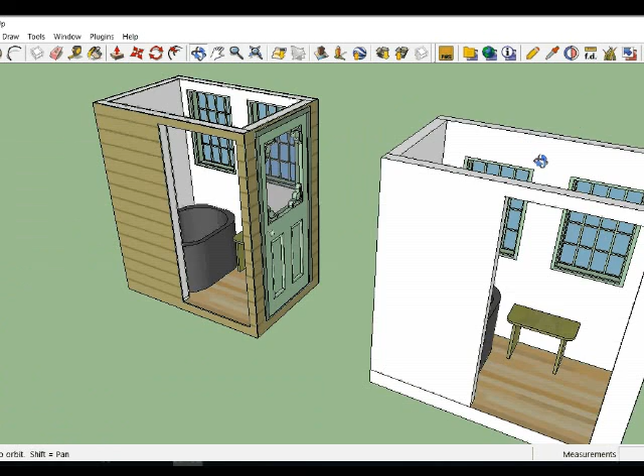So here's the supplies and materials that I've got so far. Okay folks, this is what I am planning on building off of the back of my cabin, which is the north side. I already have an existing door that is 3 feet wide, so this opening here is going to fit over that 3-foot door.

Now I show this as a 6x4, but I've actually decided to go 8x4. It will be longer because I need a little more room to open the door up, and it will also allow me to use my existing 3x3 windows.

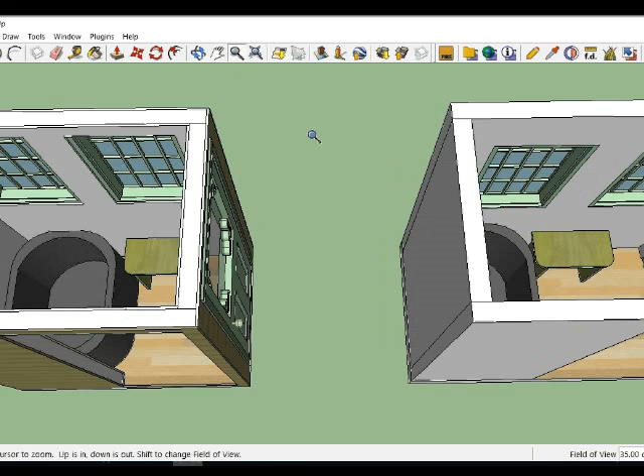So this is going to be a mudroom and a place for my Japanese style hot tub and bathing tub. It will have a door on the outside so I can go in and out, and then my door here on the cabin wall opens out to the exterior. So I'll be able to come in and hang up my winter coat and put my boots away out here when I'm out feeding the stock, and then come back into the cabin.

Because this is on the north side, this door on my cabin tends to be cold and has a bit of a draft. By putting this insulated room over the door, I should add some wind protection to keep the draft down and keep some of the cold out of the cabin. So that's the benefit to the cabin, but it also gives me a place for a tub, because I don't have one in my cabin, only a shower.

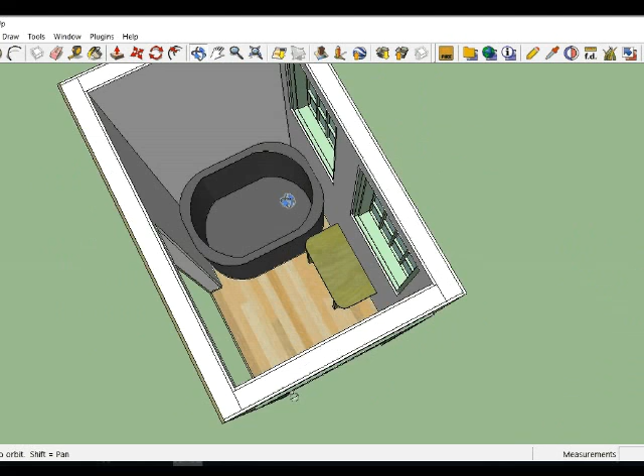So I'm going to put a water trough tub in here that I've already used as a hot tub, and I'm going to plumb that separately from the house. It has enough room to be used either as a hot tub or as a regular bathing tub.

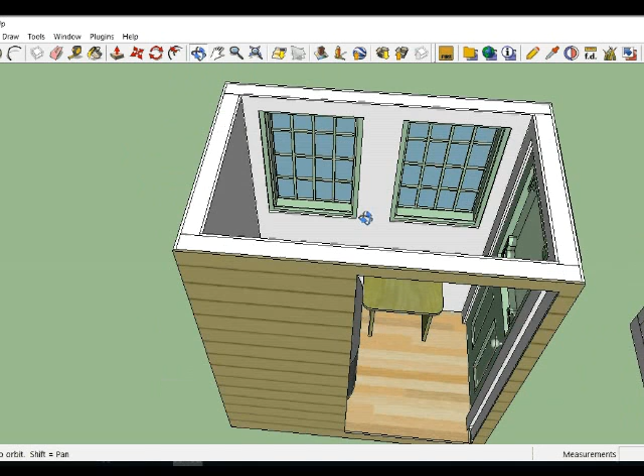I'm going to do this in Japanese style because I always love that, with a simple wooden bench. This will be a little longer than what it actually shows you, and I'll have some coat rack hooks up here, so when I come in I can hang my coat up and put my boots underneath the bench.

Then I can come inside the house, so I can leave my snowy stuff out here in this mudroom to keep it out of the house so it's not dripping all over the place. And I can go in anytime I want because this is insulated.

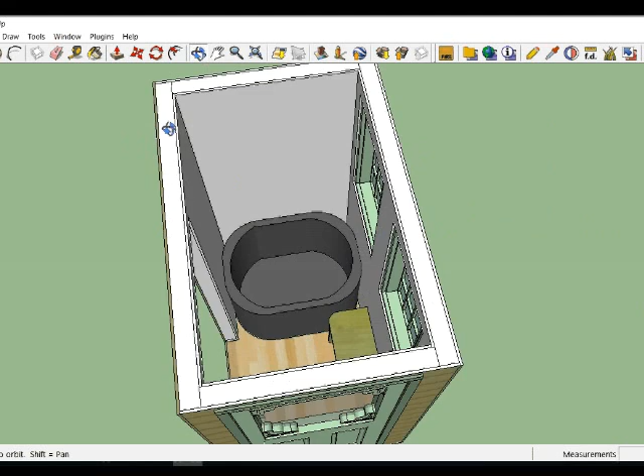I'll be able to take a nice hot bath, which I really miss in my place. I designed this with 2 existing 3x3 windows, so there will be a 3x3 window here, a 3x3 window here, and I've got a really nice view of the mountains behind my cabin that I've always wanted to use.

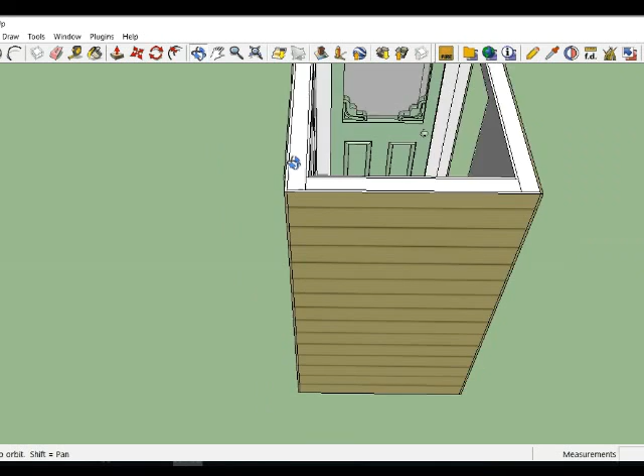I'll be able to lay here in my hot tub, drink a beer, and look out at the mountains and enjoy nature. Now I designed a couple of mock-ups because I wasn't exactly sure how I wanted to build this.

It's actually going to be 4 foot by 8 foot. This is showing 4 foot by 6 foot, but you'll get the idea. I did a mock-up first of just flat walls so I could figure out where I wanted everything and how it would look.

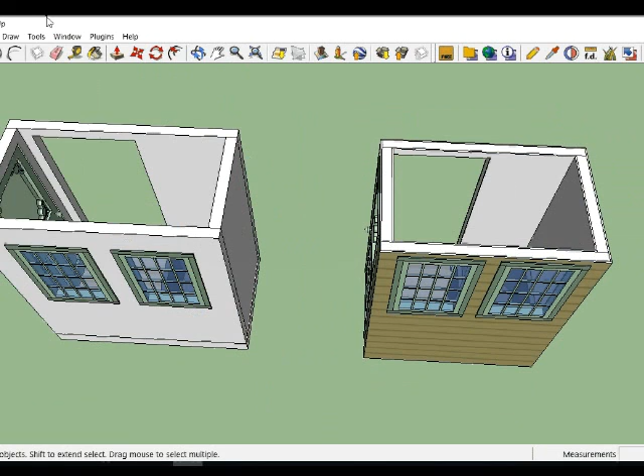Then I did this in SketchUp with my framing so I could actually show the framing, and I wanted to figure out how much material I'm going to need.

I'm going to build this out of 2x6 material for the floor, 2x4s on the walls, and that will allow me to put R13 insulation in the walls, which is the cheapest insulation.

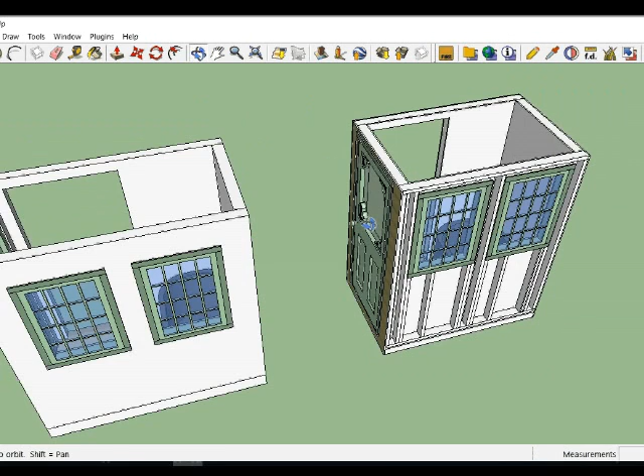I already have the existing 3x3 windows, and I'll show you I already got some other material today. I have most of this material except for the lumber, and most of the equipment I need for this mudroom.

Alright, so that's what I plan on building off. This will have a shed style roof. I don't show it with the roof, but it will extend out with an eave over at about a foot, then extend up and connect on this wall. This will be a freestanding unit.

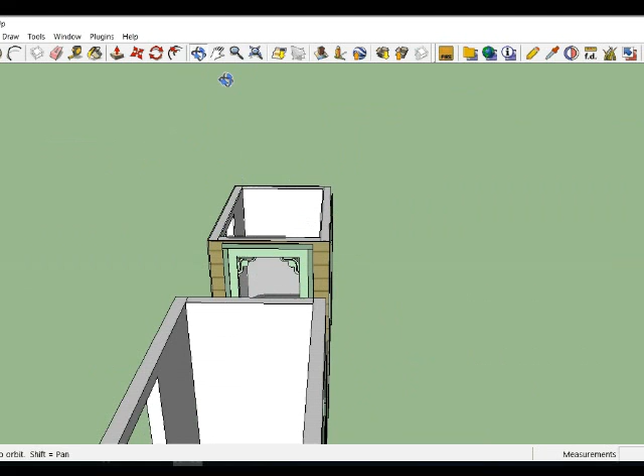I'll probably use metal roofing, unless I can find some asphalt roofing that matches what I already have on the cabin - I'll try and find that. If not, I can find some cheap metal roofing, usually extras left over from some bigger project.

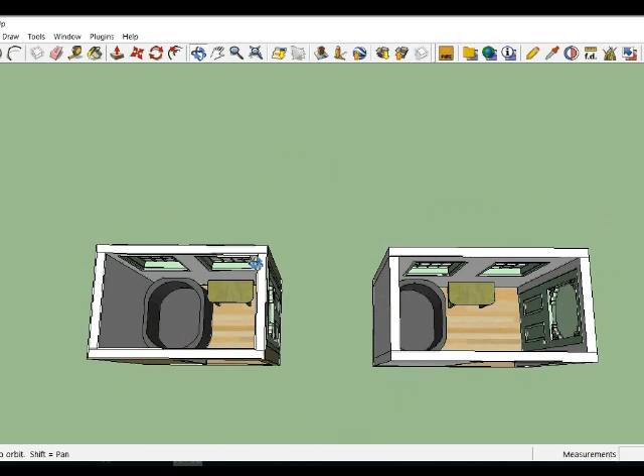My budget for this is $300. I'm trying to stay way under that, so I'm already scrounging around for materials, and that's what I plan to do to keep this under budget. Alright, let's go look at the materials I've already scrounged up for this project.

Okay folks, so this is what I already have in the way of materials. I've got this tub - let me pull out my tape measure here. I measured it once, it is 31 inches wide and 40 inches long. So that will fit inside a 4-foot wide room, I've already figured it out.

Just barely, leaving just a little bit of room to slide it in. That will fit perfectly, and then I'm going to surround it with a wood board to make it all fancy. That's my plan anyway. And maybe put some rocks - I'm doing this in Japanese style, so I'll put some rocks and things around it.

So it looks kind of like a horse trough right now, but when I get done with it, it will look like a Japanese bathtub, hot tub. So that's the plan. It already has a drain hole down there in the bottom.

Now, the other materials that I already have, that I've scrounged before, I have these 2 big windows. They're 3 by 3 foot windows. I bartered, when I was doing pest control, with a lady for 6 of those windows, because they had just replaced all their windows and had them sitting against the side of their house. I asked what she was going to do with them. She said, we don't know, we don't have any place for them. They didn't want to sell them, so I said I'd just barter for some pest control. I took 6 windows for a pest control treatment, so I basically got them for free.